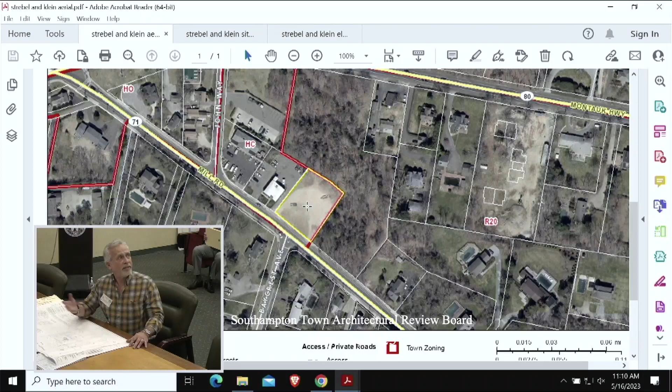406 Mill Road, Westhampton - next to the post office, and the other vacant lot that the town owns. The town owned this for a while, and Mr. Strebel purchased this property from them about a year ago. The intention was to build an office for him - he's an accountant, lives locally in Westhampton Beach, and this is where he wants to move his office back from Hauppauge.

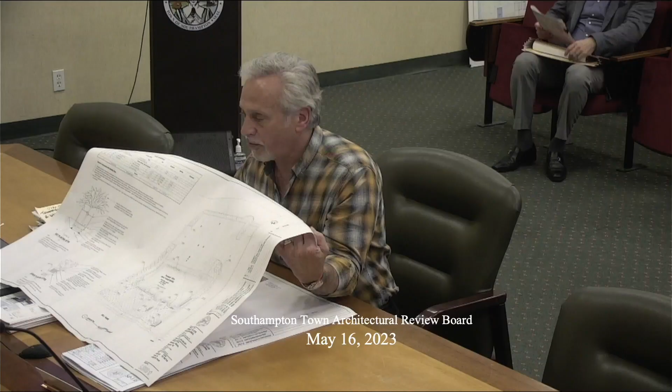So, there's no site plan up there with landscaping, but we did submit to the town an extensive landscape plan that was presented before the planning board. And I can show that digitally if you'd like, and explain the building, what we're looking to do.

Again, it's a one-story building, trying to keep it nice and low-key. We were introducing a little bit of stone, stacked stone, on the south elevation facing Mill Road, with Hardie board also in the colors you see here, which is the sand color. Would you explain the colors for the public? Sure - the stacking stone was going to be in natural browns and grays.

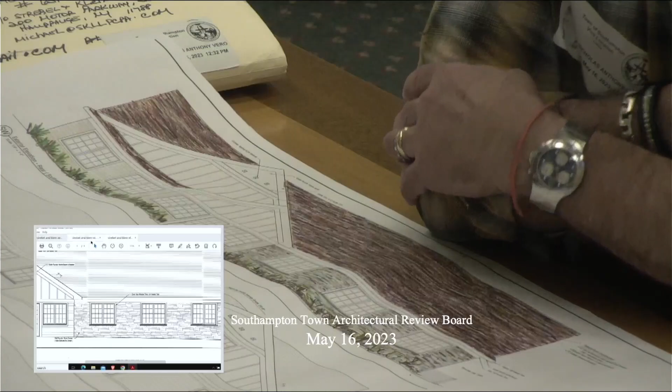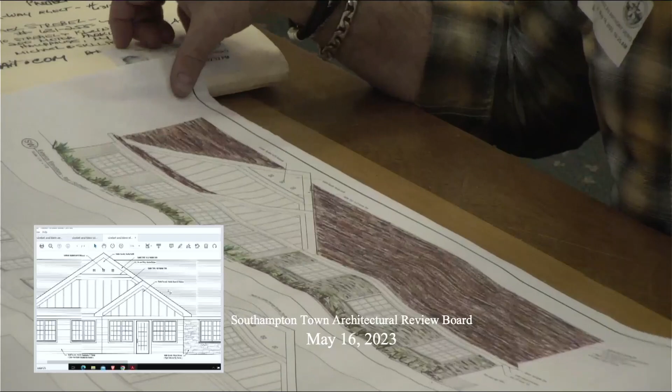Just a portion of the building, the east side on the south elevation. The other portion, where there's a break for the front entry vestibule - let's go back to the front elevation. South elevation, I'm sorry - right there, that elevation we're going to do the Hardie board in the sand tone color, and an architectural grade roof in weathered wood, mimicking cedar as it weathers. Everything else would be AZEK trim with gable end details and board and batten type.

And again, the gable details, all in AZEK, staying white trim around the windows and doors. I apologize for not having the rendering done sooner, but under the time strain I only ordered it last Thursday. Okay, Mr. Tagliavia, comments?

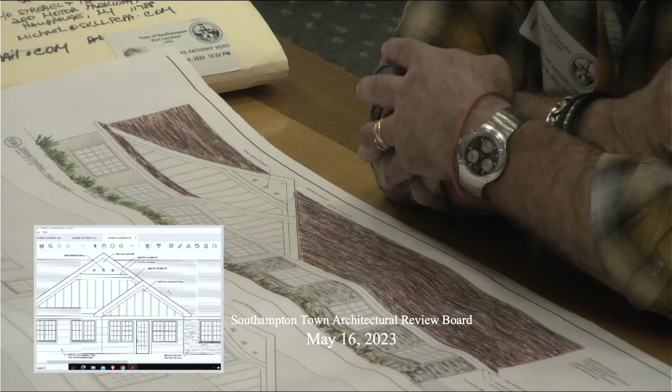Is there any lighting on the building? There's no lighting on the building. We only have lighting on our parking lot, all night sky lighting. Is there a plan to add lighting? If we do add lighting, it would be all coach lighting at the doorways and on the side of the building, but most of the lighting's going to be in the back, obviously for the parking and landscaping.

Mr. Chairman, do we need to see the lighting before we make an approval if it's going to be posted on the building?

Yes, we can do that. We can even make a motion and have that submitted to you, and then you can do the final approval.

So the way we would do it is coach lighting on the building at the doors and possibly the sides. That would be the only lighting. We don't have a sign designed yet.

They were going to a separate sign person, so we'll be back for our sign. That'll be a separate application. Right, because we can review it and then have you add to it.

Any further comments, Mr. Tagliavia? I would just like to see the lighting and the color rendering, the stack stone or a sample.

Okay, send it to us and we're happy to push it through. I can get the samples of the stacks down to you ASAP. Rendering maybe end of the week or next week, if that's fine, and we'll put it in the file.

If you have a sample, you don't need the rendering. Okay, well if I have it, I'll give it to you.

Ms. Keys, comments? Where is it positioned on the lot, how far back? It's positioned pretty far back off the lot, 30 feet off of Mill Road, because the parking is in the rear. And to scale of the lot, what's the size of the lot versus the size of...

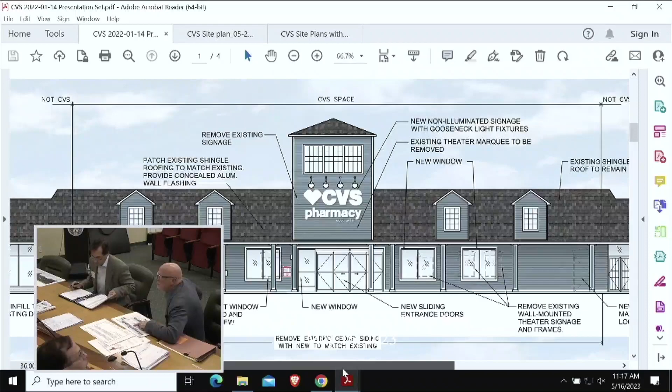We're replacing a 15,000 square foot movie theater with a 14,888 square foot proposed CVS store. We are not expanding, we're actually reducing the size of the footprint to add some dumpster locations in the rear of the property.

This is a rendering, or an elevation really, of the front. I think Marco has a better rendering of what it's going to look like because the windows shown are kind of opaque, where we're showing clear glass. I think that was submitted electronically as well, but this is basically what the rendering looks like.

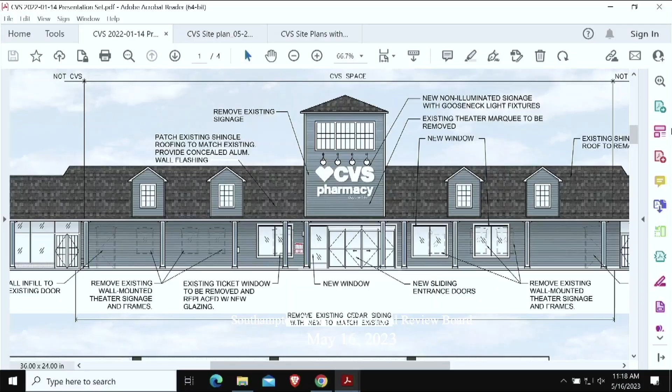The elevation on the screen is the proposed elevation, in which we are removing the lot boxes that exist there today, and we're adding some windows for visibility into the store as well as our main entrance. The siding along the front of the store is going to be replaced to match the existing siding on either side. It's basically wood siding, and it's painted.

The marquee over the entrance, which is there today, is actually shown on the existing elevation. This is what it looks like today with the marquee. The marquee will be removed. Any shingles that need to be replaced, we'll replace them to match existing.

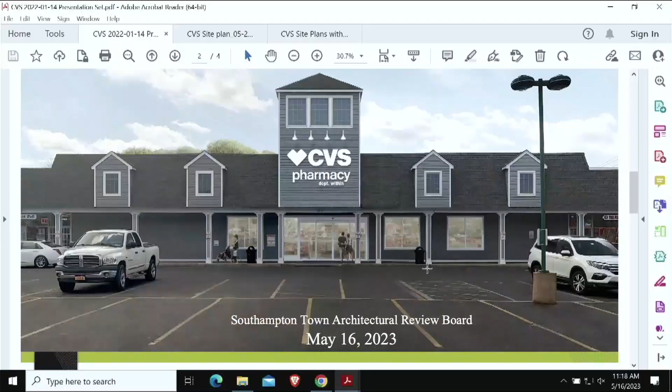And we're proposing signage where the marquee is today: CVS Pharmacy. We do have some details. This is non-illuminated — it's externally illuminated, I should say. Not internally illuminated. It's just illuminated externally through gooseneck lighting.

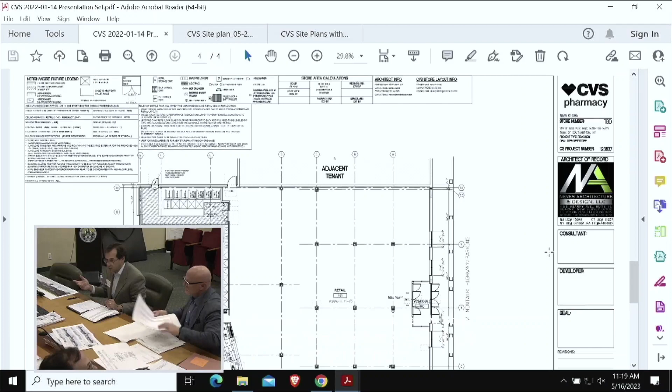That's going to continue, that's what we're proposing. I have some lighting details and also signage. I have 3 copies, I don't know if I have enough — here you are.

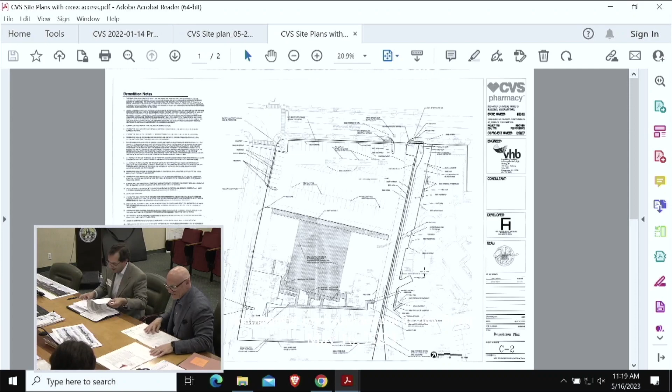We can walk you through that if you'd like. So that's the building sign, and also the street sign, which shows that it meets the setback requirements of the town code.

And then if you look at the last page, it's got the exterior sign, and that's going to have uplighting.

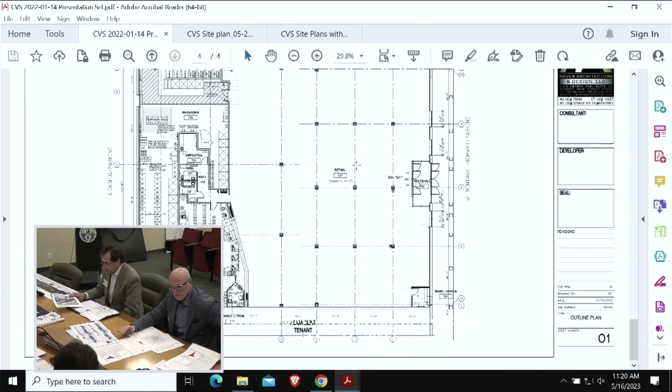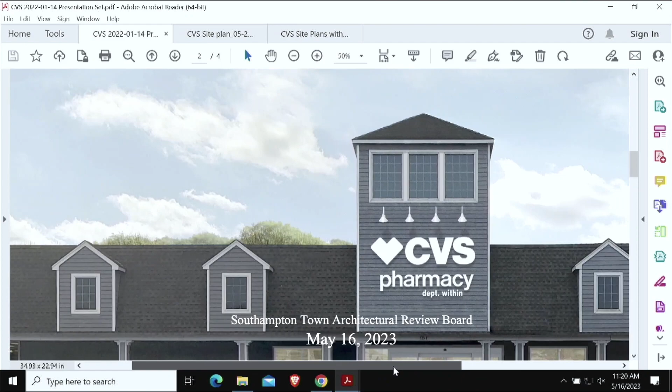Would you be willing to lower the signage and the lighting down to be reduced, lower than the ridge line of the building surrounding? So if you take that horizontal line at the top of the ridge, to keep all of the contents within that, so it's not as grand — if you drew a line straight through the heart and top of the CVS and lowered that down.

Lower everything down. Mr. Tagliafieri, are you asking for the lighting to be at the roof line, or the sign? I would think the whole assembly just to be below the ridge line. Well, as you've indicated in this rendering, it's below the ridge line at that point — you see, the ridge line is here, and that's below.

It's on the last page. Basically taking this down, I don't think it's going to compromise the visibility of that, so if the lighting is at the ridge line, reduce it to its scale. I have no issue, but ultimately CVS is going to make that decision. We'll take that back to the applicant. Good idea, okay.

Yeah, sure — oh, it's just on this one. Yeah, you're right, it's on the plan itself. It's not shown that way, only on the rendering.

There are also some hours plaques that we are proposing by the entrance, and then there's one at the receiving area in the rear by the receiving door.

Normally there's signage, and it would have to be given to us as a separate application. We'll provide this, that's fine. Okay, and the back would be one application, the front would be another application.

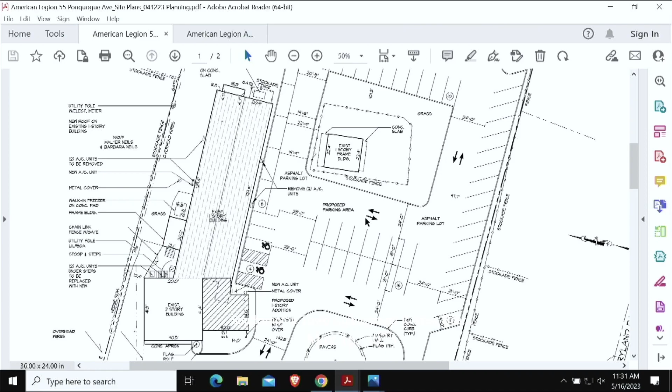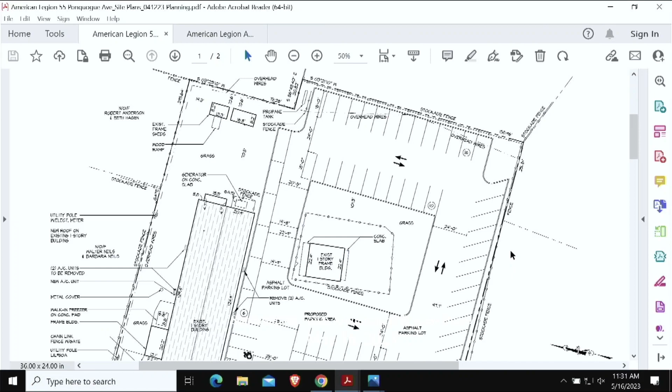A year or two ago, there was another structure behind the memorial that was taken down - an old house that was previously removed and permitted separately. There's another structure further back on the property that's going to remain. Basically, because the existing site is just a hodgepodge of paving, asphalt, dirt, and grass, we're going to clean up the overall site and provide additional parking so they can park in a more structured manner, working around the existing structures on the property.

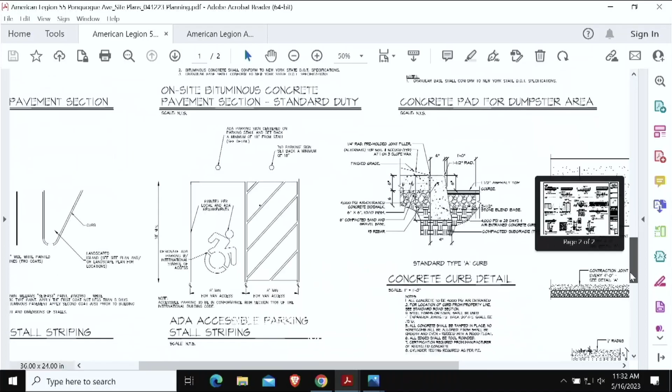Do you have an elevation of what the new proposed lobby and addition will look like facing Ponquogue Avenue, as well as the south elevation? Yes, elevations were provided - this is everything I have. In terms of the elevations, they're going to match the existing siding, which is white vinyl, and the roofing will match the existing roofing.

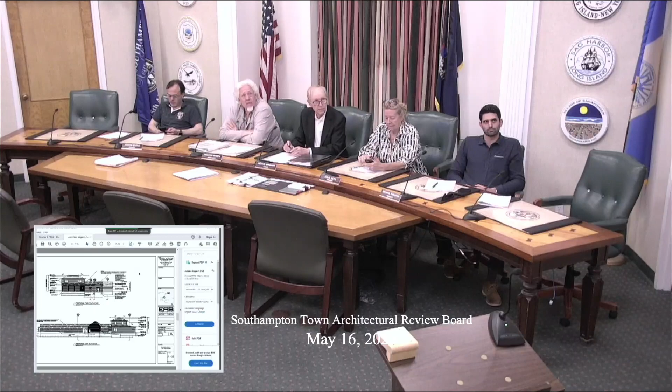I guess I'll share my screen with you. Can you see that? Yes, we can. Okay, so I'll quickly go back to the front. So this is the property - can you see my mouse moving? Yes, we can. Okay, so this is the addition here that we're doing.

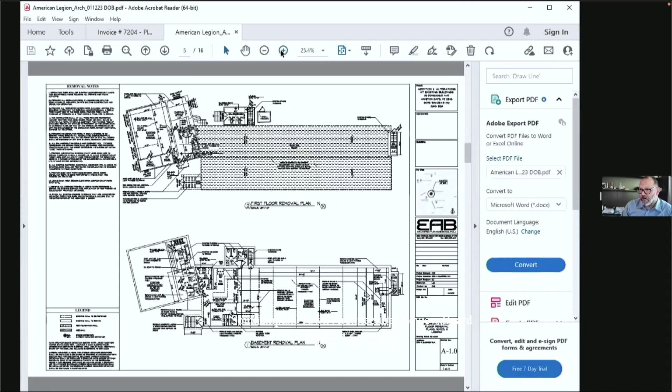This is the existing memorial that's staying, and the existing house that's also staying. We're creating a new parking lot that goes in this area, around that structure. So if you look in here - sorry - this is the proposed structure that we're going to be adding in.

You'll come through these double doors, there'll be a little overhang in front of it, and you'll come into an open lobby. We're putting in the high-low water drinking fountains, which are required by the new code, and men's and women's restrooms here. Then the elevator over here, with the stairs that will remain going down. This is reconfiguring the existing steps just to be modified to get to the existing structure, which is an office, and then to the garage.

And then this is the lower level. There's going to be storage underneath where that area was we just discussed. You come down these stairs, and there's an existing bar here that's going to be slightly modified, and then you come in - the rest of the space is just a large banquet room.

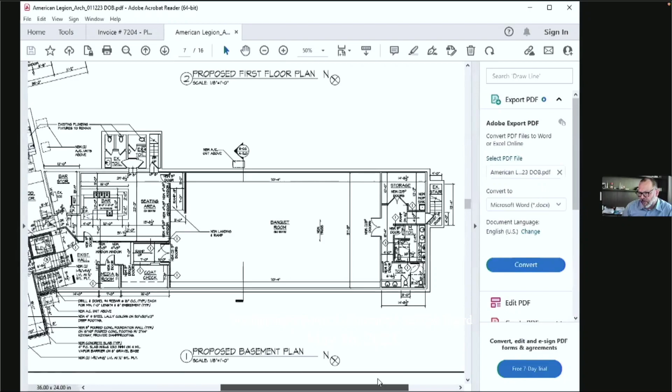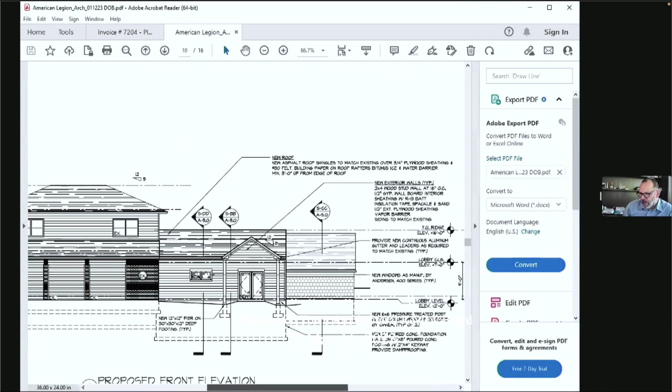So it's a very simple looking structure. This off to the right, that's just what the angle of it is going to look like as it goes off at an angle, but you won't really be seeing this in this type of perspective. We're just putting a small roof over some double doors, and these are windows that open into one of the restrooms. The rest of the structure is staying, and we're matching the siding. The siding and everything is going to be matched to what's there, as well as the roofing.

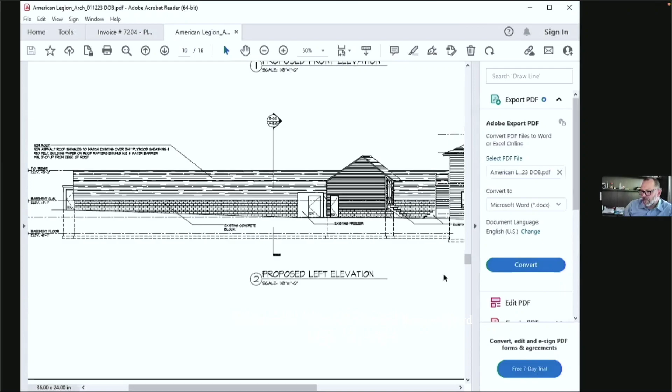Correct, so this is a view from the left side of the structure, with the banquet hall and the new roof. This is from the rear of the structure. This is what that A-frame will look like, but because of the angle it's shown that way, it's going to be like a regular structure. And this is the other side of that front piece.

That's the side that faces the site with the parking and the monument and everything else, correct? Right, so all this here is the existing structure. This is the side that's the new addition, facing the monument. This is that little roof over in the front. The building's very eclectic, but I think the addition we're doing is simple, and I think it'll match nicely. I agree. I think a pitched roof over that hall will be a bit more aesthetic as well.

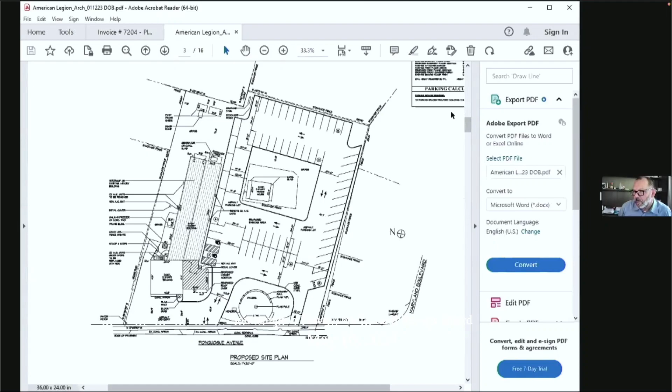Any landscape improvements planned for the site at this point? The monument they did in the front, I think has mainly pavers but some small planting area. Along this side we're just going to put grass in to make it look nice. It's all patched in right now. So we'll put grass there, and along the back there's not a whole lot of room. I think we'd be open to put planting areas in these corners, and perhaps in the front area, but there's not a lot of area available for planting.

Well, I'm sure the planning board will review that with you, but in those two areas, maybe you could add a couple of large trees to add some scale and some greenery to it. Right, okay. All right, I have nothing else.

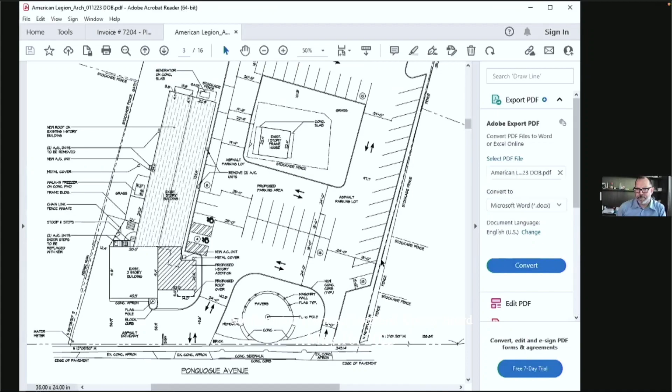Okay, Chairman, thank you very much, Mr. Rump. Mr. Burke, comments? No, I had nothing further from what was said. Tagliavia, comments? I just have one question.

Is that long corridor CMU painted block, or is that going to be new siding to match the existing sidewall on the exterior? Yes, that's just going to be, it is CMU, it's just going to be painted.

Okay, that's it, no further comments. Ms. Keys, comments? No, I think it's great, I think it'll look much better. Thank you. My only comment is, yeah, it is quite a bit eclectic, but you seem to have cleaned it up a little bit, and I think the pitched roof will probably fit with the neighborhood a little easier than it does now, because within that neighborhood area, this is the only flat roofed building. Yeah, I think it'll be fine.

Okay, this is a referral from the planning board, so all our comments will be transmitted to the planning board. Thank you very much. Thank you. Have a good day. Thanks, you too. Okay.

All right, next we have substantial residential, 724 Butter Lane. I have to recuse myself on this application. Thank you, Mr. Rump.

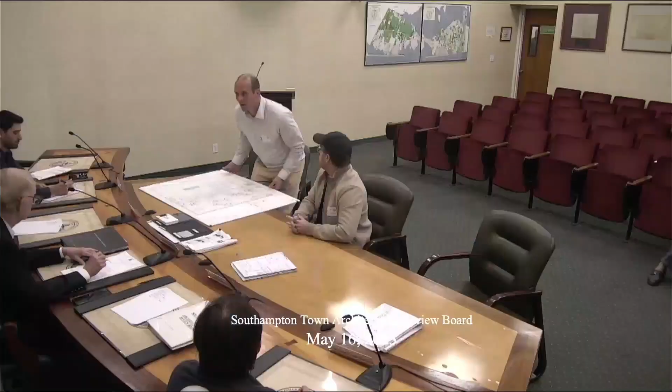Would you give the secretary your names and relationship to the application? So I'm Will Goethe, I'm the architect for the Horwitzes, architect of 724 Butter Lane. Steve Naroda with Harris Design Landscape Architects, here for planting-related questions. And just for everyone's convenience, I'll refer to the screen.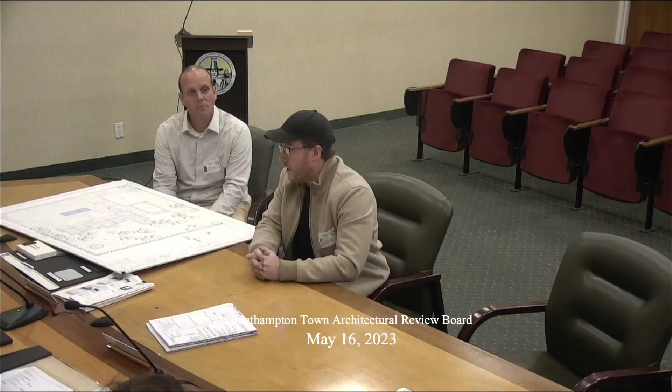So to give the board a little backstory, we presented to the ARB this time, or February last year actually. Since then, we went to amend our permit and went through some pretty substantial redesign, under which the footprint shifted, and so now we're here representing.

So this property, this is the latest Google Earth. You may or may not be familiar, there's a house that has been built between our flag lot property and Butter Lane, so this is not reflective of that, if you want to orient yourself. The property is visible from Butter Lane as you travel north.

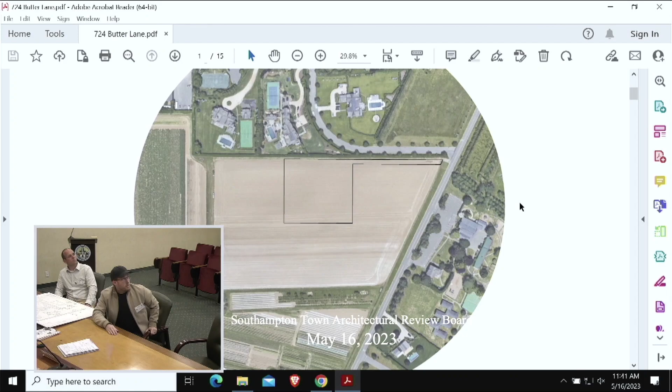We are proposing a residence. If you'd like to go to the site plan here.

I guess we'll tag team a little bit on the planting, but the idea here is, before we started any work on the property, it was barren, it was farmland. So what we're trying to do is really prioritize bringing in a lot of native landscaping, making it feel like it's always been there, not standing out like a sore thumb. A lot of our exterior materials, the treatment we've chosen, is natural, very organic.

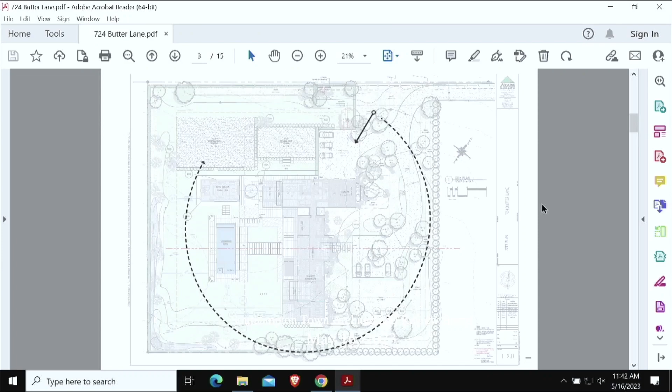This landscaping, as you can see, will stay here for now. Very winding, trying to feel organic, not as clean cut as the 2-acre parcel that we sit on. It does sit quite a far ways back from the street. So really, from a street view standpoint, the priority is to soften that view so that it's not a big, large residence in your face.

Steve, do you want to talk a little bit about the planting and the species you're using? The main thing, we've already planted arborvitae along the property line to this corner, along the Butter Lane side, just to help screen the property. Okay, what height is that? They were planted at, I believe, 10-foot height.

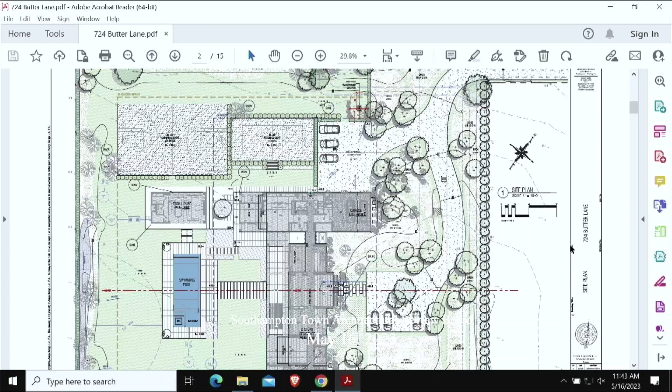The idea is to just let them grow while the house is under construction. They have irrigation on them, and they'll probably be growing. They have good sun exposure, so they should be doing pretty well.

The rest of the property, we're surrounded by ag reserve land or farmland found on the back side of the property, and the idea there is to use, like Will was saying, more native plant material, clumps of bayberry, some trees, and then trying to keep some of that view shed open where it can complement the view and kind of pull in the agricultural feel that surrounds the property.

We are at a low point here, so the farmland drains onto this property, and we're having to deal with the edge conditions with bioswales. We're trying to do it as naturally as possible so there is natural leaching into the earth, but again, the ground is pretty hard, so we're having to recultivate a lot of the ground.

And if you want to go to the next slide, this is just to show you how our views, the next series of views, are going to be taken. We're just working around the house in this direction. So this is your view as you approach the home from the flag lot, from the driveway.

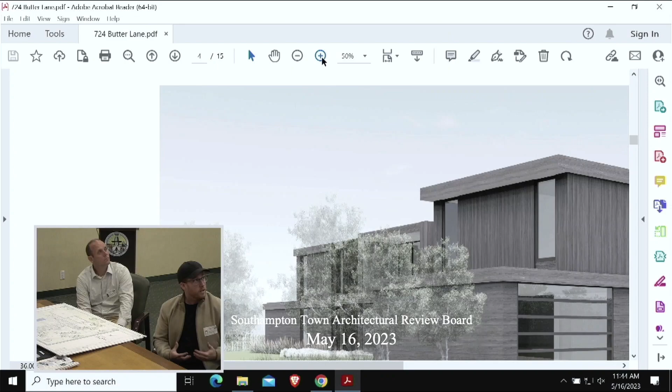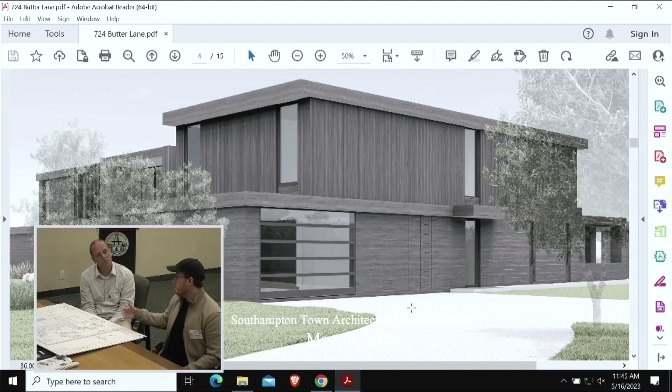We're using a series of wood siding. There's some soffit conditions that are treated with a neutral toned plaster. Apart from that, we have a combination of horizontal and vertical wood. There's these 2 horizontal bands that wrap the house. There's a lot of effort given to making the front feel organic and soft, and then the back definitely opens up to the view. We do want to take advantage of the farm view.

In the next view, again, making our way around, we've got this natural wood that flanks either side of this front entrance. Actually, the next view is even more revealing of that condition. Again, we're doing our best to show exactly how Steve and his team have decided to treat the landscape.

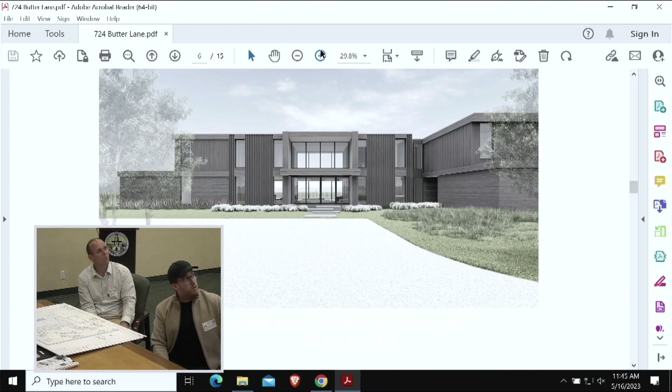And what we did is these views, again, I admittedly feel a little cold, and we did do another view where we wanted to show how we do think the materials are going to activate this perspective. So if you go to the next slide.

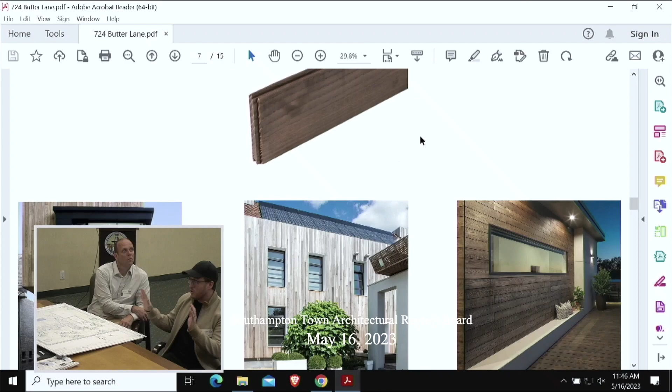And we feel like that's going to give it even more of a natural, embedded feel into the site, limiting the amount of white, especially from the street side, limiting the amount of glass that we have facing the street. Again, I think that will really help it feel blended in.

And if you go to the next view, this is a more accurate representation of how the wood, the white ash, is going to work. The subtle contrast that we do have is between the plaster and the white ash, which you can see the plaster is on the inside of this opening and on the underside of the overhangs.

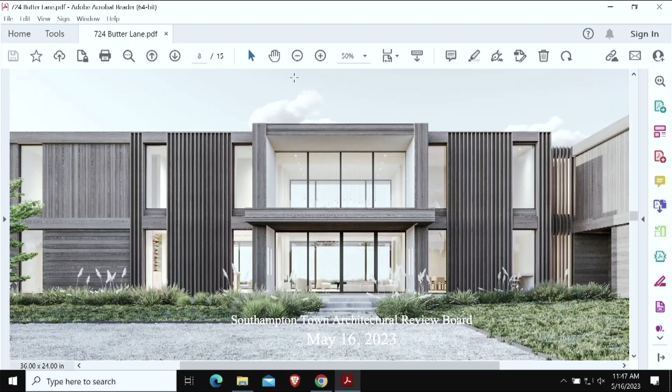The lighting scheme, again, from the road and from both sides, we wanted to be very careful about how we're lighting the house. We're trying to be very modest with how much uplighting we're doing on the exterior.

If you continue, we circle around the house. This is a great view traveling northbound on Butter Lane, the view you'd have if you could see past the continued growth of the arborvitaes. Right now you can see it pretty clearly, but as you can see, we've got a more solid front. Next slide, this is a view of the side of the home.

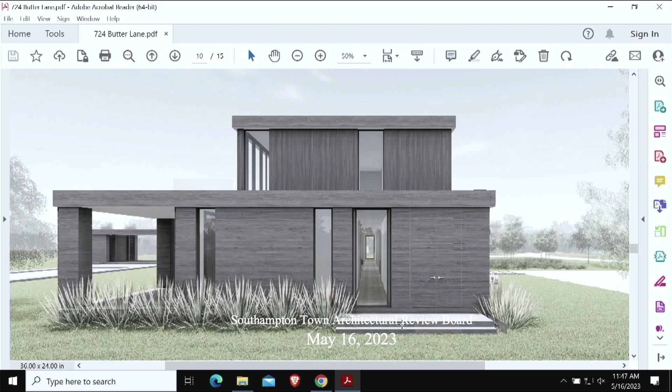We wanted to make sure there was a strong connection with the landscape everywhere around the home. Architecturally, there's a central corridor that connects both sides of the property to each other, so that's what you're looking down right now. In the next view, this is the house as it opens up into the back.

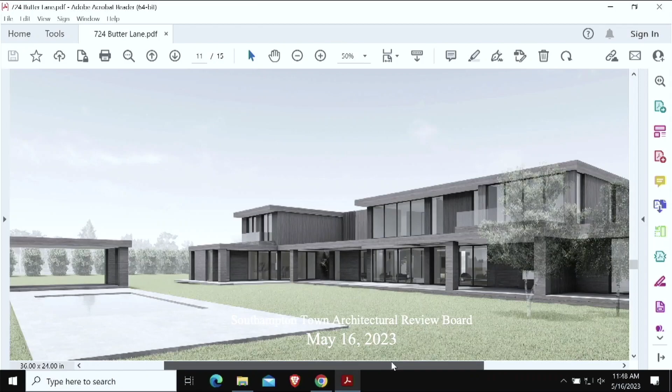The landscape here isn't filled in the way Steve is showing it, so take this view with a grain of salt. The final view infilled with their design does it a little more justice than this. But in the back, we definitely open up more—it's not as closed and solid as the front of the home. Most of this is for privacy, both from the neighbor and from the street side.

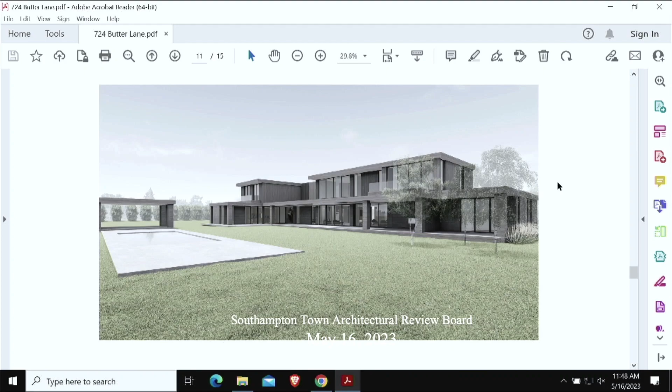If you continue to the next view, this is a little more detail in the back. You can get a good sense of the overhangs, and then the subtle contrast of the plaster and the wood siding. The last three pages are going to be the most indicative of what we're proposing.

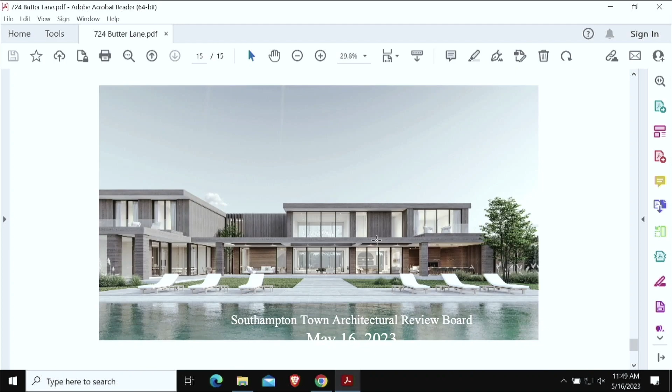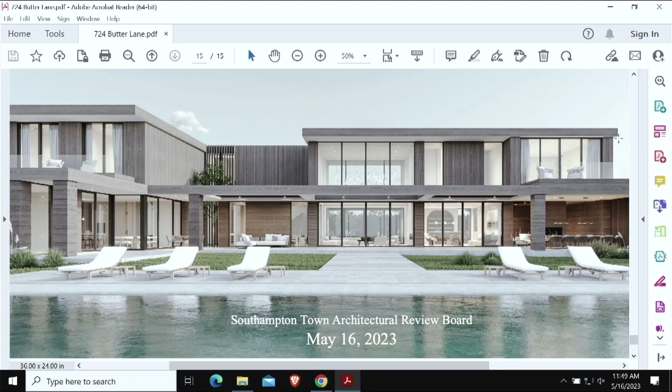Okay, and that concludes your presentation? That concludes my presentation. Ms. Keys is the lead on this, and would you give the board your comments?

I just have some questions. So what is the size of the house? It's roughly 7,500 square feet above ground.

Is the top a deck, or is that the roof? The roof—there's no roof deck. There are decks on the second floor, if you can see there. Yes, I do see it, left and right.

So when this ages, is it going to age in that lighter cedar? Yeah, I think right now this is probably a good view of what it'll look like two years from now—it's starting to gray. The white ash isn't as yellow and light as the cedar is. It's going to stay pretty warm, with some warmth to it.

And is the arborvitae going to be about 10 feet? It starts at 10, and they can grow pretty tall, so it depends. My concern with screening is we're getting light coming out of the building, you know—that would be the next issue. Arborvitae can get to 30 feet tall over time.

All right, then I have no issues with this. Mr. Tagliavia, comments? No further comment, I think it's a beautiful design. Mr. Burke, comments?

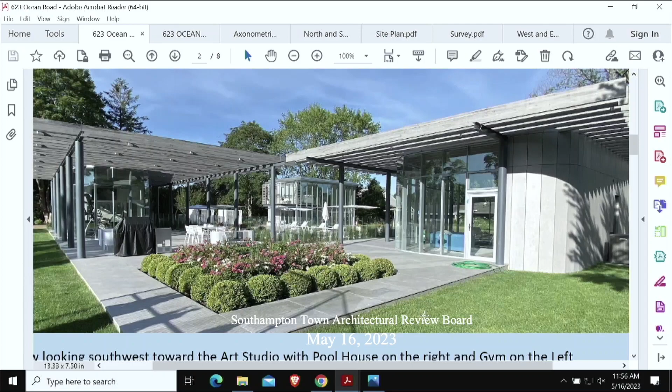In this picture, you have the pool house on the right, a gym on the left, and then my wife, who's quite an accomplished artist, has her art studio, the glass structure in between. For the house itself, if you go to the next couple of pictures, you see different views, and one thing you'll notice throughout is a tremendous amount of landscaping done to relate to the architectural elements.

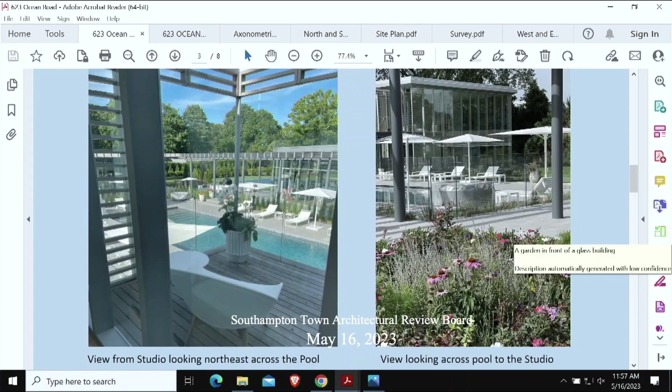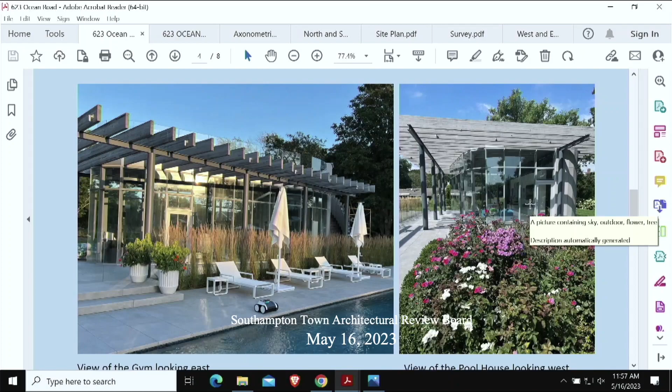We've planted hundreds of elements on the property. We lined the entire property line, north and south, with arborvitae. We built a 6,000 square foot wildflower garden on the back property line. We moved two 70-foot high zelkovas that were at the front of the property, pinched against the foundation of the existing house, having them moved to the back to frame the tennis court. We also may be the only ones in the United States to have bought this Caucasian wingnut, an Iranian tree from the Caspian Sea.

Called the Caucasian wingnut. It's spectacular, with a 6-foot basically caliper base. We placed it facing the art studio as an example. So we tied all these huge trees that we could save and take care of into the design.

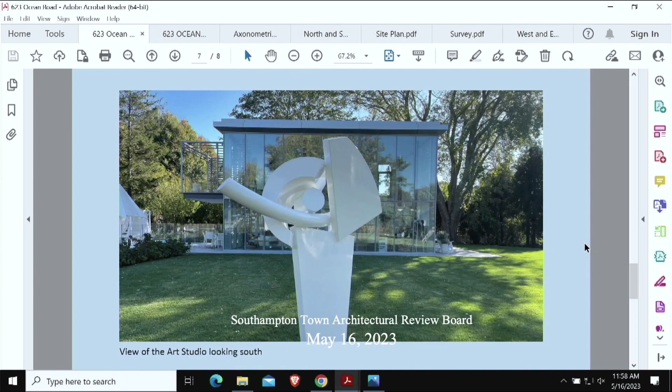So you'll see when you look through the material, and then go back and look at the site plan, the landscaping features near the pool and tennis court—my wife's an artist, and one thing she paints is tremendous abstractions of flowers, so she composed a lot of the floral layout you see here. If you look at the last picture, the property will be covered like that, like the back is. The front will be very similar.

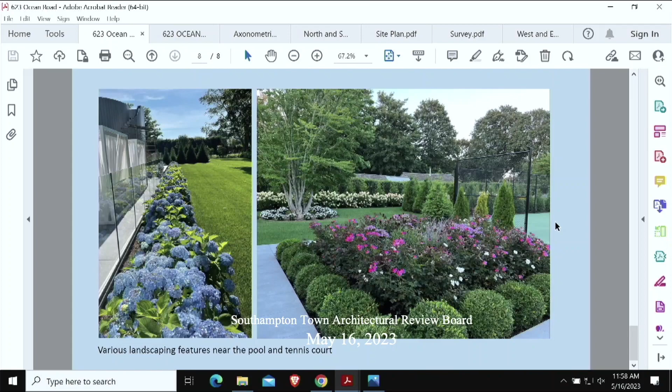And if we go to the site plan... Is this the back of your house? That's the front, that's the front, the back. Let me show you, we'll talk about the back in a second.

If you look at the site plan, we're set back about 150 feet from Ocean Road. The large trees you see in the front are existing trees, and one of them is a European weeping beech, which is another rare tree. That's the first tree you see on the corner.

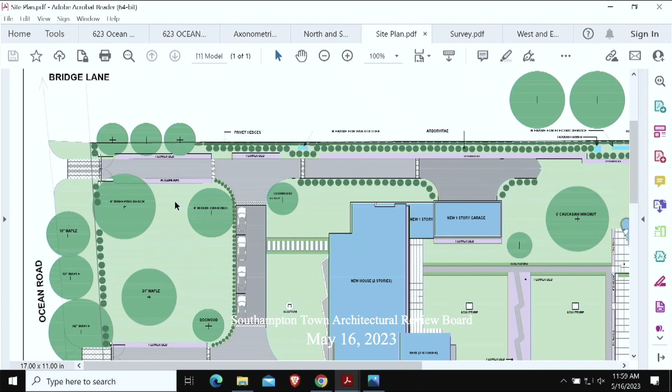One of the problems with the site now is that you enter literally very close to Bridge Lane. So the idea is to make the entrance further from Bridge Lane and have the exit be the current existing entrance. The house is set back to create enough lawn in front for the architectural vision, and the back of the house is very glassed to open to what's happening behind it.

So if we go to the axonometrics, the first one after the survey, we have the site plan, then the survey, then an axonometric that gives you the idea of the presentation of the front.

The materials are very consistent with what's going on in the back. This is the material that would be used for the screen wall in the front. So when you see that undulating wall, the idea is that it sets the screen. Behind it you have the glass behind the veranda, and then this is the cement panel.

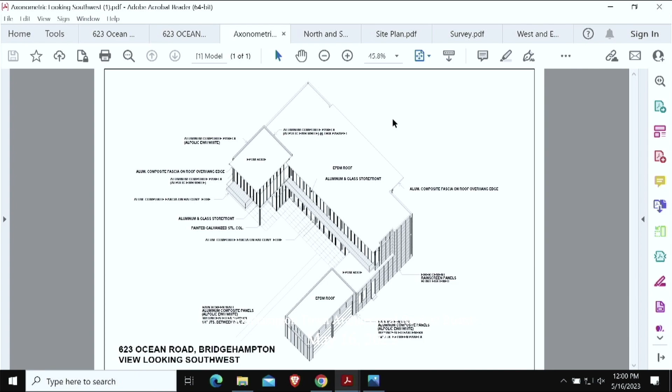This is a material that Richard Meier, for example, used a lot. It's a cement panel, which is like a stone. And then this is the mullion color that goes with that.

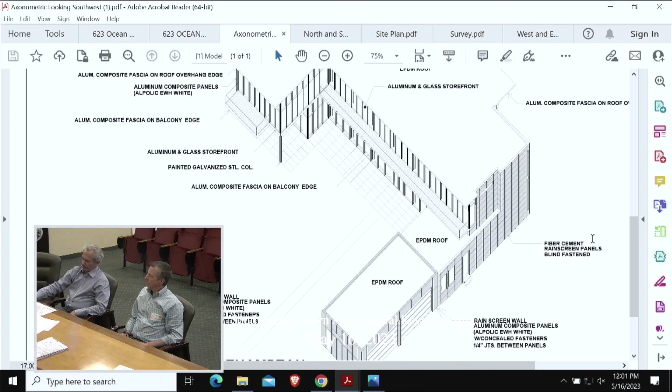The idea is there's a lot of white and gray in this area of Bridgehampton, whether it's modern or traditional. So our idea was a modern interpretation of creating that kind of front wall, with the roof overhanging the entry, and then the glass behind it, which is really for the vertical circulation of the house, behind that screen wall.

Okay, and that concludes your presentation? Well, I'll give you the back too, just a quick thing—the back gives you an idea of the glass. It's very open to the back because the back is the lawn, and that's where you have the accessory structures.

So, open to questions. Okay, well, I'm the lead on this, this is in my area. My comment is, I like the way you've considered the site, and I'm very familiar with the adjacent houses—you've used materials that are very similar to everything in that whole neighborhood.

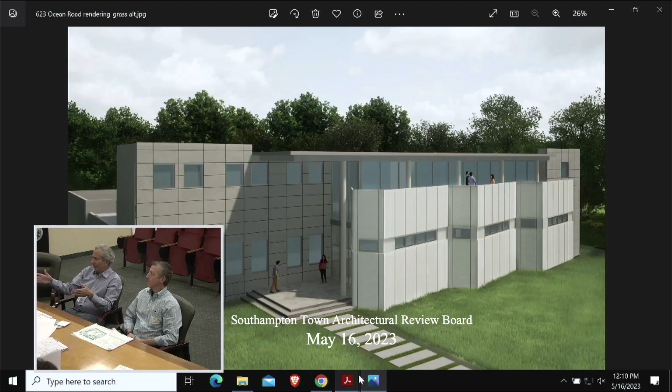If you have a plan rendering that makes it look less like this, that would be... maybe a little model or something, just to give the feel, because the trouble is when you look at the rendering, it looks like it's covering the whole property, and it's not. The front facade is less than half of the width of the property. That's one of the things that's misleading, because I had the architects quickly zoom in so you could see the building. But maybe we need to, if you wanted me to do it, I can do something that shows the scale of it. Maybe that's merited. Yeah, I mean, sure.

Mr. Taglia, comments? I have a couple questions with the materials of the aprons at the street, and also, do you have an entry gate design? I know there's a lot of artistic expression here with this property and design, I just want to make sure. We have an entry gate, I think we don't have it up here, but it's very consistent with the existing picture of the side view of the art studio - you see this one that has the screen facing west.

That is basically the impetus for the gate design. So you would have that kind of a horizontal line, a frame for it, and then basically a stone, like a gray granite, for the piers. I think that's more in context with the surrounding area. Just because of this expression on the front elevation, I wanted to make sure that that wasn't going to be something different.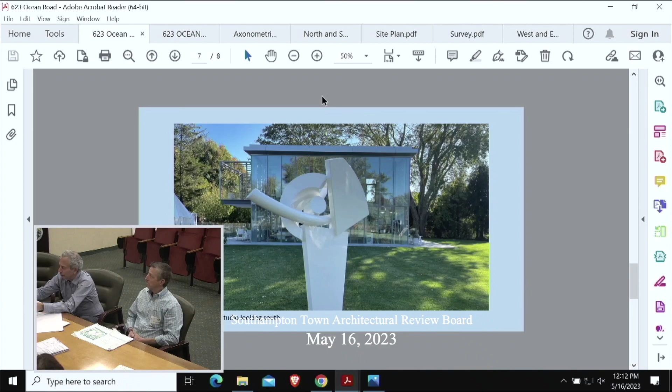We can give you that street side drawing. I would appreciate that. Yeah, the whole idea was, if you look at this, I know you think it fits more with the image of the front, but we steered away from doing that, to do something that was a little bit different. I hear what you're saying, I don't have a problem with the front facade, given that it's so far back from the property and you're not seeing it from the street. You're expressing your own design intent there.

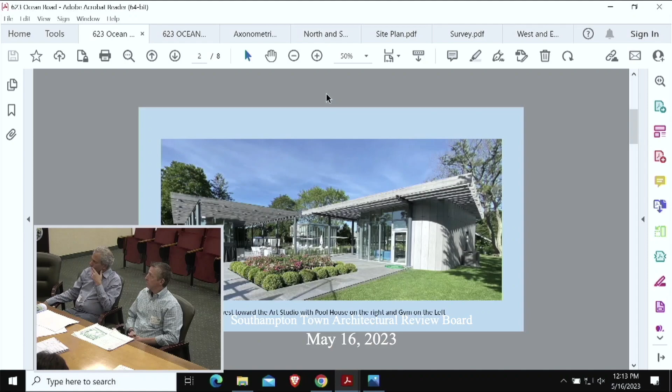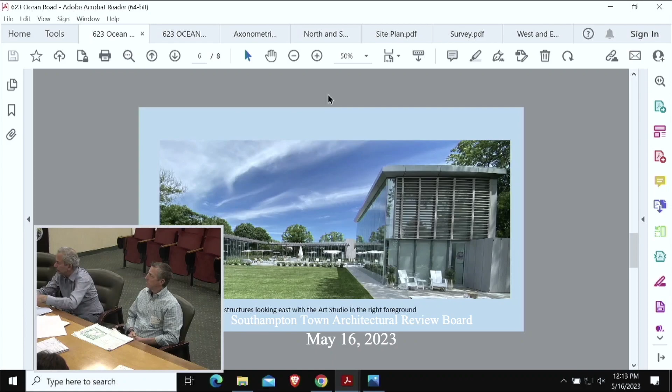Just wanted to make sure that the gates themselves were in more of a similar context with the surrounding area. We can give you that drawing. And then they're very close to the property line as well, and the keypad for the gates has to be on your property line, so you may run into trouble. If you notice, the property line, the gates are behind the property line, and the keypads would be on the pier, which is on the property line.

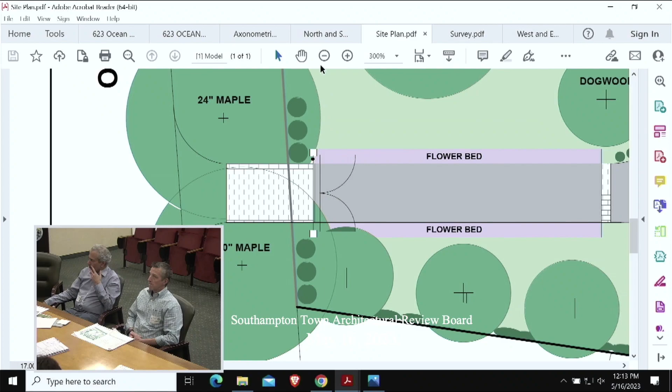So it's not on the street - you're not gonna have that operating when you pull up with a vehicle? No, remember, this is the entry, that's only gonna be the exit. So you're going to be coming up. Yeah, so that's why I just wanted to check with you, within the submission, a driveway gate design. Yep, no problem. Okay.

All right, any of the board members would like to make additional comments on this? If none...

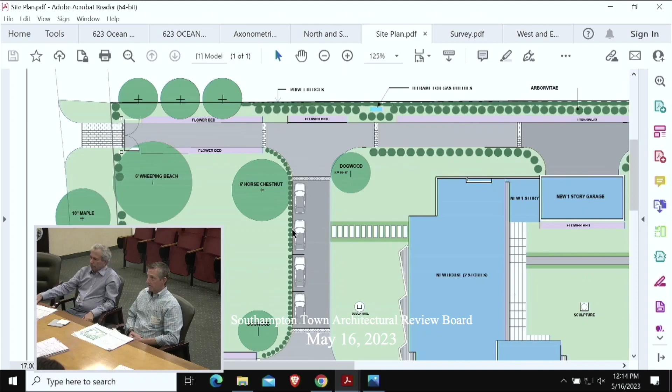Basically, you've screened the whole property. And that's normally what we would require anyway, even for a very modern house, or even if this was a pink house, because you've got to consider your neighbors and everything else, and their privacy and also their values. So, this is why I had no problem with it.

Do I hear a motion to approve? I'll make that motion with the stipulation that you submit a driveway gate design. Do I hear a second? I'll second it. Motion has been made and seconded. All those in favor? Aye.

I'll make one final comment. I totally agree with Ms. Keys that this is a massive area. If you didn't have it screened, I would have problems with it also.

Happy to bring something back and work on it if you wish. I don't think you're wrong. I think there's a gesture being made here that's sculptural.

It's an architectural vision that's different than existing. It tries to put a new face on stuff happening behind it. If you note, above you have all glass facing the veranda, so I think it would be a very interesting contrast to what's below.

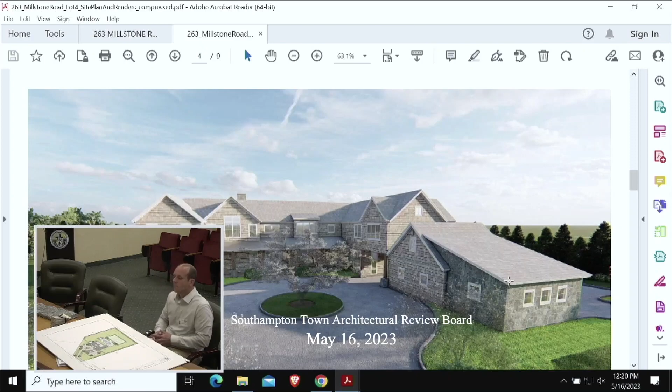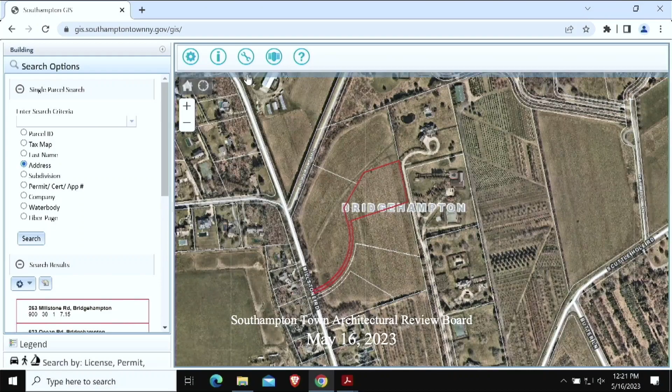My name is Paulo Rodriguez, project architect for McDonough Conrad Architects. I have here an 8,000 square foot house located on a 109,000 square foot lot, roughly 2.5 acres. We have basically a typical Hampton-style house with A-frame roofs, cedar siding, some cultured stone for accents, and a cedar roof.

We have a circular driveway with a porte-cochere going through to the three-car attached garage. It's an L-shaped structure. There's an in-ground pool at the rear leading to a sunken tennis court.

Okay, Ms. Keys, you're the lead on this area. I'm looking up the actual location on Millstone.

Which side of the road is this on, the east or the west? This is on the east side. Okay.

I don't have any problems with it, it looks fine, no comments. Mr. Tagliavia? I don't have any comments either, it looks pretty well concealed from the street and within the aesthetics of the surrounding neighborhood. Okay, Mr. Burke, comments? I agree with nothing.

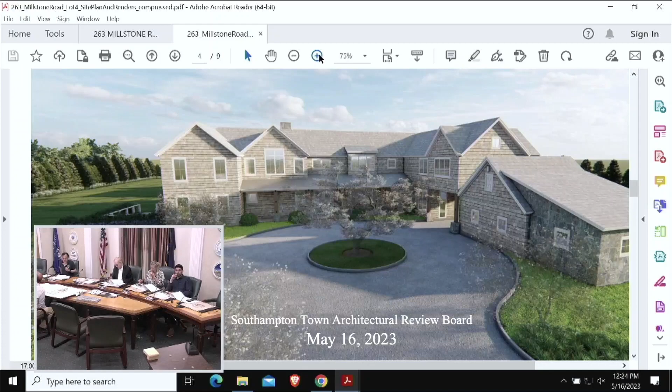You mean this? No, this porte-cochere, so you drive through to the garage side. You come in on the north side of the structure, drive through to the rear, or south side, to the garage doors. Wait a minute, I think you mean where?

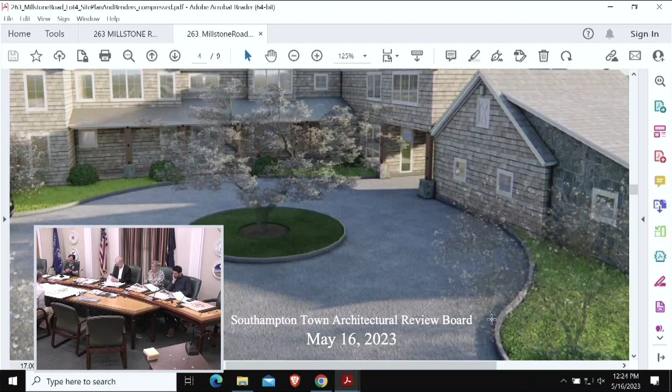I'm looking at the other side of the garage, which is this? Which elevation? That, you were looking from the south there. Yeah, this is the south elevation. Okay, all the way to the side, it looks like a conservatory.

Over here? It's a glass structure. Hold on, I'm trying to see. Oh, that there is a screened-in porch. Screened in, okay, glad I clarified that. Yes, I apologize, but it's a screened-in porch.

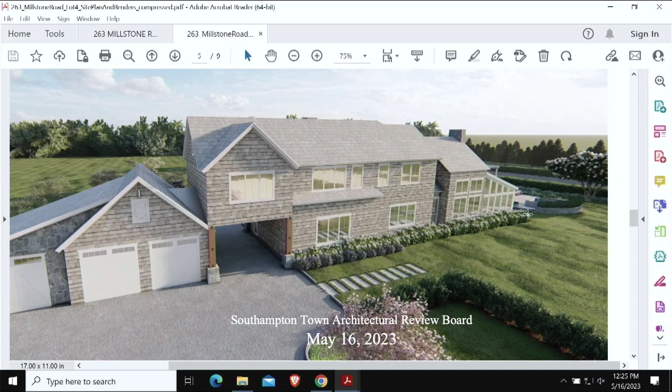I'm glad you matched the sides of the house to give the whole house balance, because if you didn't have that, this would be quite prominent and not look so great. I agree 100%, so I have no problem with the rest of it. And plus, you've screened it sufficiently all the way around.

Do I hear a motion to approve? Motion to approve. Do I hear a second? I'll second. Motion has been made and seconded to approve this as submitted. All those in favor? Aye. Thank you very much.